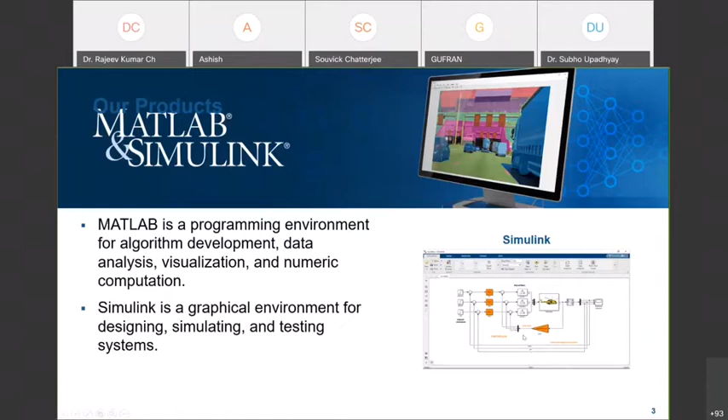So we have a controller, and then we can have transfer functions, and then we can use all of those. And then there are multiple toolboxes for specific applications, like this is typical of computer vision, but we can have multiple different based on the applications. So these are the products.

In terms of users, we have multiple users, many from academic environments, and then there are loads of commercial and industrial usages as well. If we look into any automotive or aerospace companies, every top automotive or aerospace company uses MATLAB Simulink for control systems, for AI, or for many of the building automation applications, which we will talk about as well. So many companies, like Tata Motors, Toyota, Honda, Audi, Tesla, all of them have been using it in different forms.

And we'll talk about how it is used for buildings as well, because for example, Tata Steel has been using it for their factory energy management. In terms of industries, aerospace and automotive till date are the biggest users. So if we think about, say, from NASA to ISRO, and then maybe Airbus, Boeing, so all of them are using it in this form.

Then there is biological sciences. There are multiple research efforts ongoing in the sector of COVID-19 as well. If you are interested, you can look into COVID-19 MATLAB and Simulink research, and we have dedicated a page so that faculties and researchers can talk with each other, and we work with them to make these things faster as well.

Then communication, electronics, energy production, which we will talk about today, is one of the sectors as well. Railways, we have been engaged with railways in multiple forms as well, for things called predictive maintenance, which goes into industrial machineries and things like that.

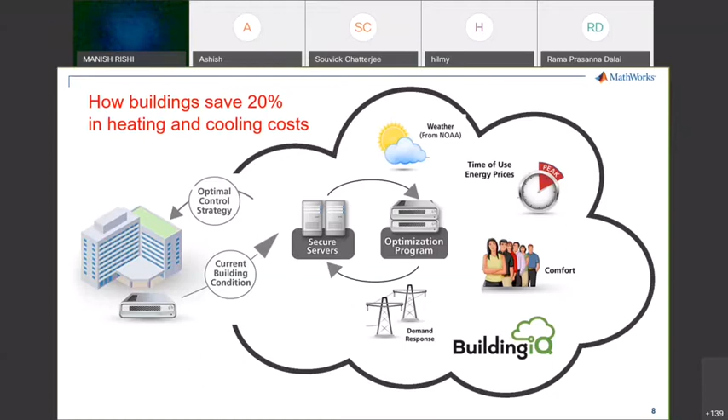And if you're into control systems, you know that we give a set point and then use things like PIDs so that we stay within that region. In a traditional energy management system, we define a comfort bound, say between 21 and 24 degrees Celsius, give the set point, and the actual temperature remains within that range.

Now in a smart energy management system, the comfort bounds are not fixed. It depends on how many people are there, the time of day, whether it's a cloudy or clear day, and what the outside temperature or humidity is. All those things come into the picture here.

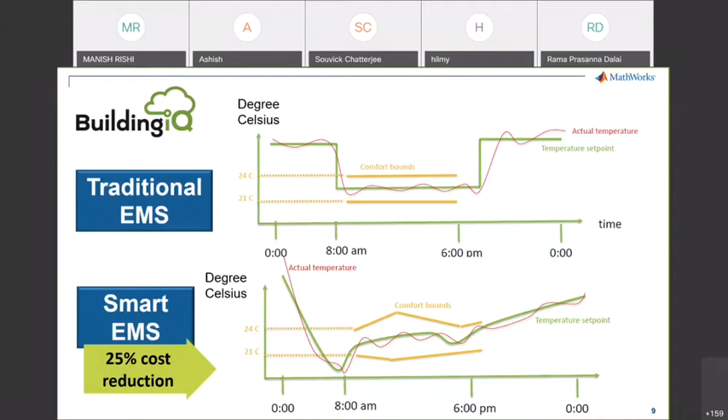So, how we define the constraints, we'll come to that—how to gradually reduce the temperature. There can be controls associated with it; we can apply multiple control algorithms associated with the air conditioning units. It's not just one split AC—when we talk about a building, there are multiple such units which need to be controlled together, so it's more about different ways of management, which we'll get to.

So static policies need to be replaced with dynamic policies based on what's happening, taking decisions in real time. It's not only about offline data—we need to account for real-time data too. We don't just run a simulation, get the best design, and stop there. We want to create a model, but update that model in real time based on the data as well. There are multiple terminologies for this.

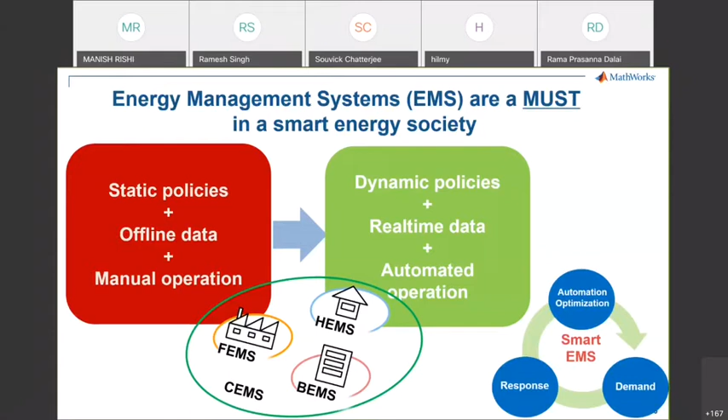What we will talk about - I won't go into the specific data for that BuildingIQ, but it is very similar, because we cannot share confidential information of that particular company. I'll give you both the PPTs and also the demo we will talk about. I'll switch over to MATLAB now and show you certain things, and then show you a link from where we can download the dataset and the models.

So let's take this example that we have a community. In this community, we have the solar panels, the photovoltaic cells, we have power electronics, and then we want to integrate all of them, essentially what we talked about.

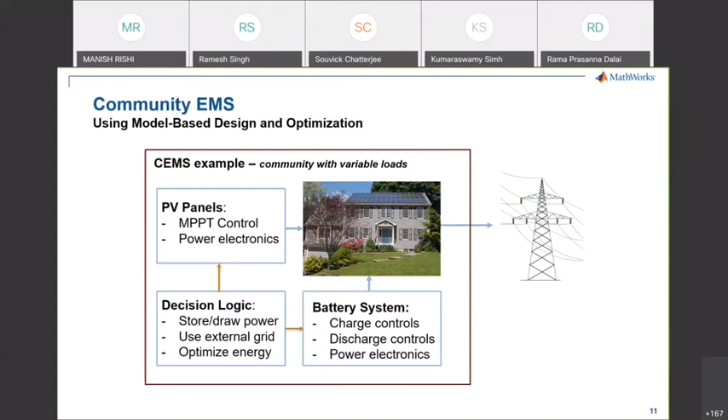The advantage of MATLAB is we integrate with all these different sorts of applications. There are things for control theories, for machine learning - the prediction part of it - for battery, power electronics, photovoltaic cells, all those things are there. So we can use one platform to do the entire modeling.

There's a terminology for that, an industry terminology - now many people are using this, it's called model based design. Model based design basically means we create the entire model of the thing we want to design in the virtual environment. So it's not like we just model the solar panels, or just model the battery - we model the entire thing, so that if we change one of the parameters of this photovoltaic cell, we know how the entire system responds to that.

We want to see the final output, like how much power we're saving from the grid, or how much cost we're reducing, even including economics as well. So we want to see if we change one of the parameters, how the entire system responds, so that we can come up with the best possible optimized design. That is not only optimized for the solar panels but might not be optimized for the entire system here, because we need to integrate all the things. So we want to design this experiment in such a way that we come up with the optimized system as a whole, so that we achieve what we desire to achieve.

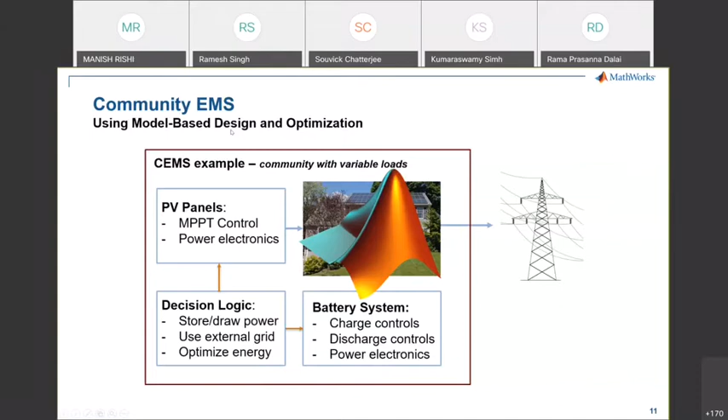It's not limited to just getting the best possible photovoltaic cell or best possible battery - we want to do that as a whole. And that's true for this battery energy management example, but also true if you think of automobiles, aircrafts, or any factories for predictive maintenance. Nowadays it's called model based design, and that's the advantage of doing that kind of simulation, where we integrate all the different aspects of it.

Okay, so now if we have to build this, what do we need? We addressed the gaps and what we want to achieve, and based on that, if we have to create this, what do we essentially need? So these are the things we need.

We need an integrated development environment where we can do all these things, like accessing the data for data analytics, because if we want to do prediction for tomorrow, we need data for the past. That is what typically the concept of artificial intelligence is, where machine learning comes into the picture, which helps us do predictive modeling.

Many people are talking about AI, and it's there in different forms now. The advantage of what we're trying to do is we want to focus on application. It's not just using machine learning because everybody is using it. We want to make sure an engineering problem is addressed when we're doing these advanced statistical models. So there comes the concept of predictive modeling.

And we cannot get rid of anything classical, like control system design. That is always there, so that aspect we have to integrate. We cannot achieve anything without the controls.

If we have to optimize the entire concept, then we need an optimization algorithm. There can be multiple different forms of optimization algorithms, and we'll come to this. You can have a gradient-based optimization method, or a data-based optimization method. So all those optimization algorithms need to be there as well.

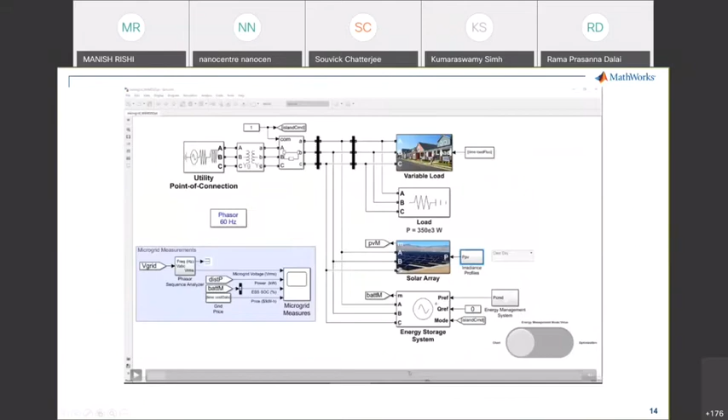So now essentially, we have this in the slides as well, but I'll go to the MATLAB environment and show you. These are there in the slides which you can see later on, but let me just go over to the MATLAB environment for now.

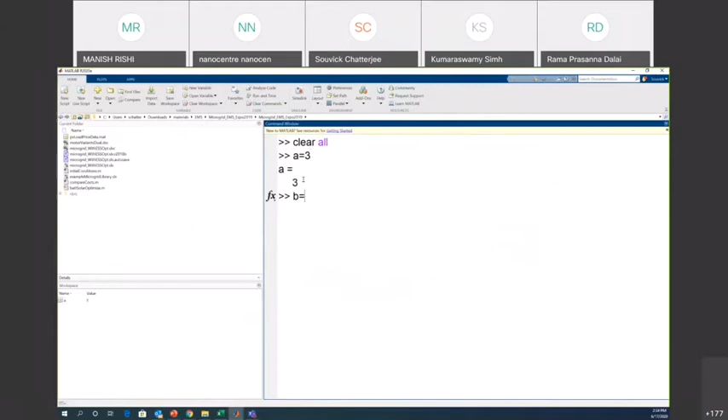Since many of you have used MATLAB, this is how it looks for those who have not used it. This is where you can do something like a equal to 3, b equal to 3, c equals a plus b, things like that. And then I can just clear this window. Clear all clears the workspace area if we want to get rid of previous values and stuff like that.

There are multiple things here. New script is where you can create your own script, the .m files. New live script is where you can create scripts which you can think of as similar to a Microsoft Word document. Let me just show you - it's like a second thing, so we can shuffle between text and code.

For example, we can just write 'example' here, and then if I go to the text format, it becomes like text. So these are not MATLAB codes.

And then if I go to the MATLAB code, let's say t equal to 0 to 100, and then y equals sine of t. If I just do this and run this section, it will run only this part, not the text part. I can break this into sections as well, so it runs separately.

So this is like Microsoft Word with MATLAB coding. These are text, which has nothing to do with MATLAB, and these are things that do have to do with MATLAB coding. So we can combine them, and then save this as PDF, Word document, LaTeX, or HTML. Now there are multiple other things here as well.

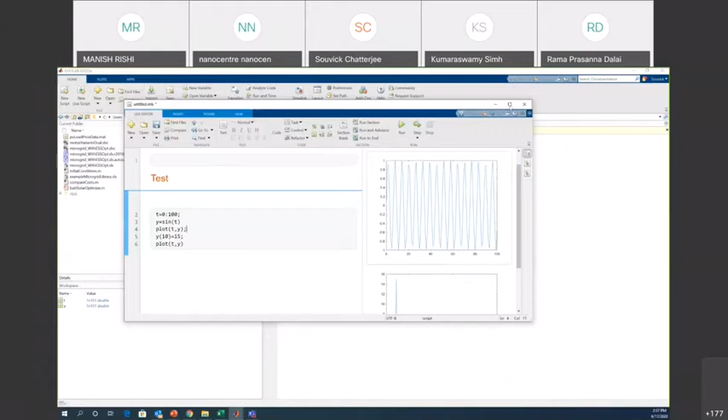I am using 2020A, which is the latest version, but you can do live scripts from 2017 as well. This is called a live script, and it saves as .mlx instead of .m format. The .m is basically the MATLAB script. If I write something in a new script and save that, it becomes a .m file. This becomes an .mlx file. The .mlx format came from 2016-17 onwards, and there have been multiple additions to this later on. I'll mention what those are in a little bit.

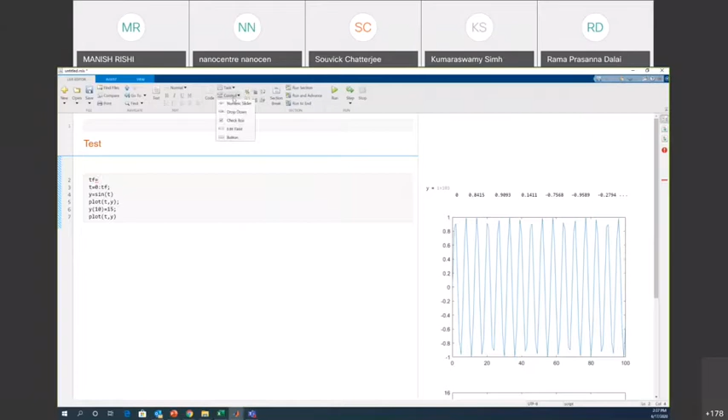So say for example, if I have this outlier now, say I want to make this 100 an interactive thing. So what we can do is say TF, and then I say this to be a control, so I can say this to be a numerical slider, starting from say 50, an increment of 1, up to 100.

So maximum to be 100, increment of 10, say. If I run this now, you can see that this changes the plot. If I make it 50, you look into this changes as well, it changes to 50. Now if I change this to 100, this will change again to 100. So this is interactive, like a slider you can put in.

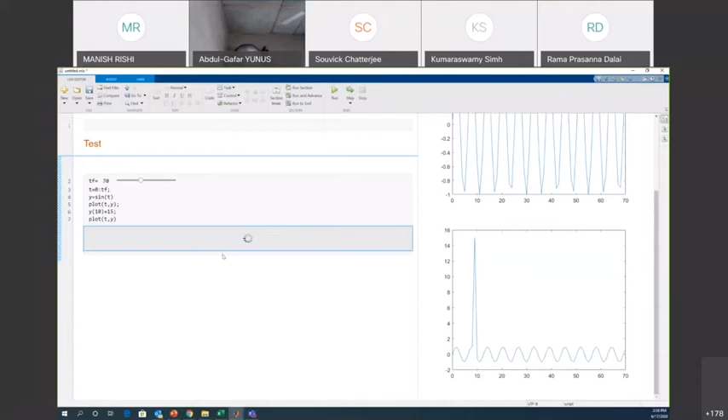This helps because you can change the parameters and see what is happening. Now say if I have this outlier and want to remove it, there's something called a task here. If I go to this task and say clean outlier data, and give this task to the live script to clean up the outlier, this opens up, and we say the input data to be y.

So this is our y data, and if I do that, let's see what comes up on the right as a plot. When this is running, you see on the right this is the outlier which I have induced inside the data. Now this live script has automatically suggested this is the clean data. Right now, this is a simple situation.

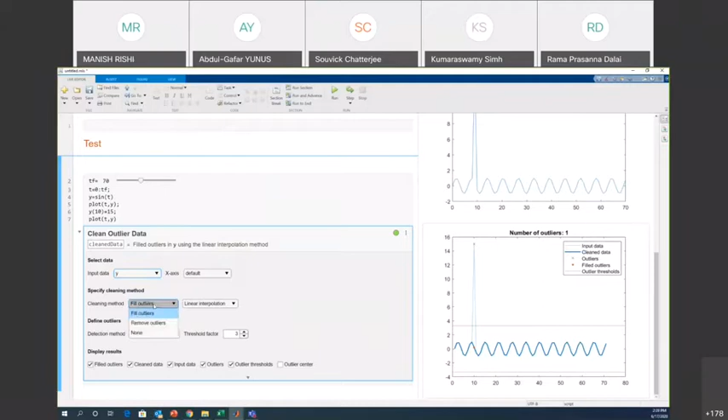I'm injecting one outlier here. But if I take in data in real time from a building for energy or load or any of those formats, we might have outliers. We can use these segments to clean this data, or find out where the outliers exist. So there are multiple things you can do: you can remove the outliers, fill the outliers, or do linear interpolation, because the algorithm is also crucial.

So all these algorithms are inbuilt, but we can also create our own algorithm and put it here as well. Based on which algorithm we use, it can be linear interpolation or just a previous value. So instead of this 15 value, it will take the previous value, right? That's how it is, it just changes.

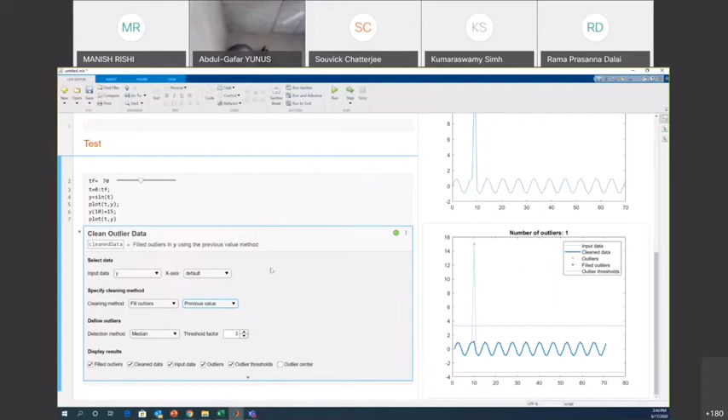And the advantage of what you can see here is we are not writing codes. I mean, we can do this writing codes as well, but what we are doing is using this task. These are like applications, apps. So both options are there, we can write codes or we can do these sort of things. So this is just an overview of what this exists.

And also speaking of these apps, there are multiple apps here as well. So if you are doing say curve fitting, we can use this curve fitting to do what we want to do, and then we can generate the MATLAB code out of that automatically.

So our live script, why do we use live scripts? We can use live scripts maybe if you want to export it as a PDF, if you want to have it as a document, like you explain the concept, and then we put those interactive sliders and things like that as well. The important thing is you have everything together. You have the document, the theory part of it. You can put diagrams there, equations like LaTeX equations, references, any of those, and then save it as a PDF. So it becomes like a full-fledged document for you. That is one advantage of live scripts.

And then you have the tasks which we talked about. So the tasks are basically these apps, and all these apps are there which we can use for any of the applications. Like if you have a signal and you want to see the Fourier spectrum of that signal, you can use the signal analyzer.

MATLAB coder is if you want to generate the C or C++ code out of any MATLAB code, so we can use this to generate it automatically. Application is if you want to develop an application like an exe file and you want to share it with somebody who does not have MATLAB, so that can be done using this. You can create an app for Android, for iOS as well using this.

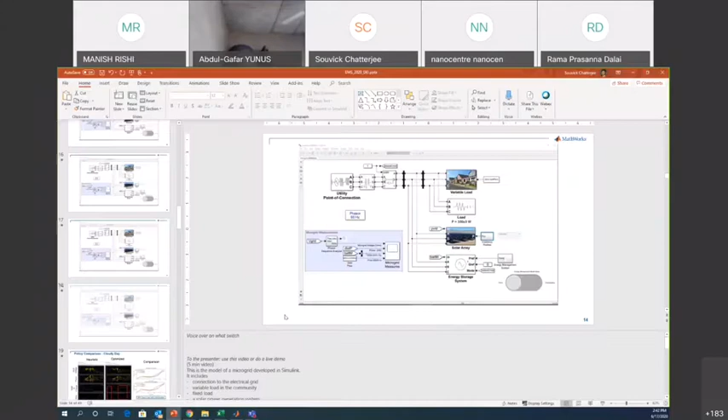Okay, so this is basically the whole concept. Now what we will go over to, this is like the MATLAB part. Now what we really also want to talk about is Simulink, because these things are more like the controls part of it. Simulink is kind of the de facto thing which people have been using.

So let me just go over to Simulink. We can open up Simulink in this way, or we can go to the home and click here. So if I say Simulink... yeah, it just opened in my other screen, so I'll drag it here, and click on blank model.

So this environment is kind of this white canvas where we can create the model we want, instead of writing scripts.

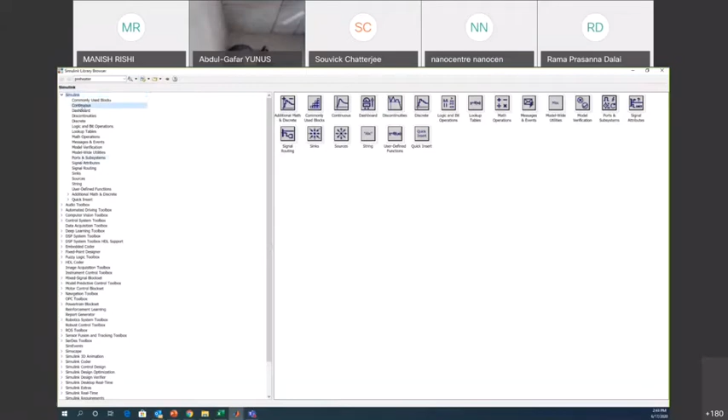So if you look into this library browser, these are the different blocks that already exist inside Simulink. If I go over to continuous, you can see there is a derivative, an integrator block, a PID controller block, and things like that. Then if I go to math operations, you can see absolute, addition, all these things. So all these blocks exist here.

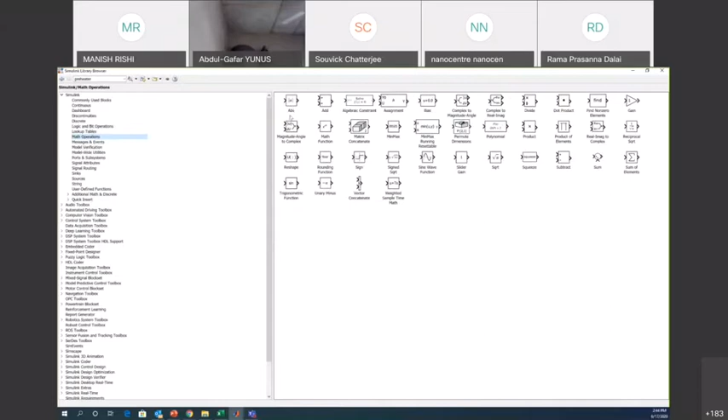All these blocks essentially have a left port and a right port, so something comes in and something goes out, and whatever happens inside the block is the operation we want to happen. If I go to the sources, you see only something is coming out, so these are the sources. And similarly, sinks are where everything ends. This is typically the Simulink environment. We can drag these things in, but for easy use I won't do that.

Say for example, if I want to draw a sine curve, I can just type sine and choose this sine wave block in sources, since there's sine, lookup table, and other options. So we select sine wave, and then I click again and choose scope, because scope is a block that's kind of an oscilloscope, where we see the graph. Then we connect these two things.

Now if I want to run this, we can just run it. And then if I click on scope, we see how the plot looks here. Now this is 0 to 10. If I want to change the time to say 100, we can make it 100.

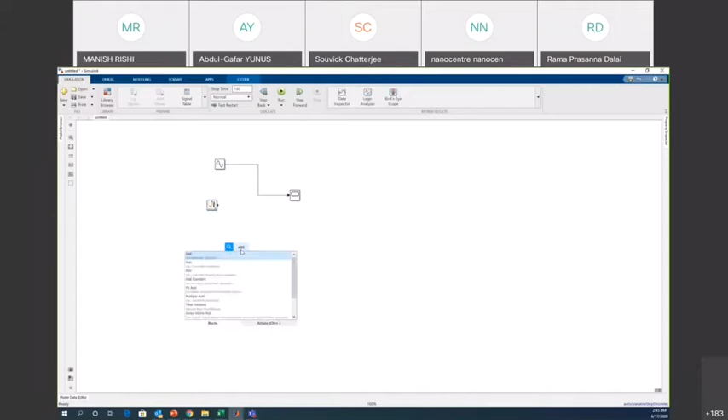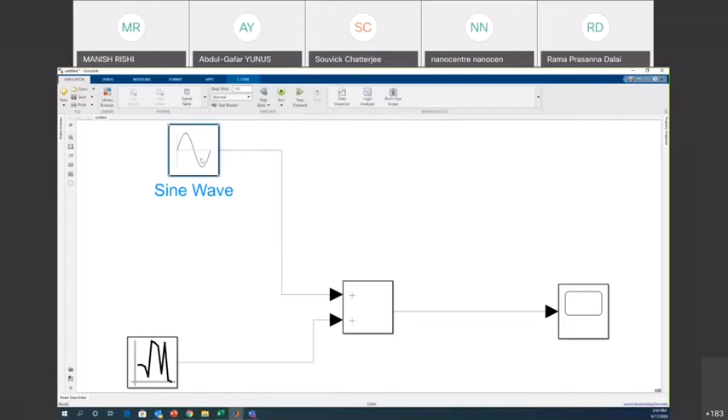Now if I want to add, for example, random noise, a random number to it, I say random number, and then I can use an addition block. So if I want to add this sine curve and the random number, and then see the output in the scope, I just hit space to make it bigger so it fits things. Now if I run this, you can see in the scope the plot has come up.

Now a question was asked: how do we integrate with hardware and convert to C and stuff? If you are using Simulink like MATLAB 2019b and stuff, you can generate the C code just using these apps. You can click on generate C code, and the C code will generate from whatever you are doing in Simulink.

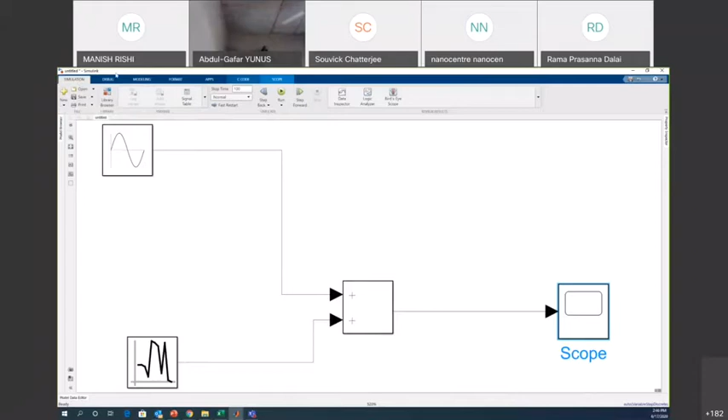So this is the C and C++ code advisor, where it gives you certain suggestions for making the algorithm better. Now if I go into this model settings again, I go to modeling, then model settings, and let me just show you this model properties.

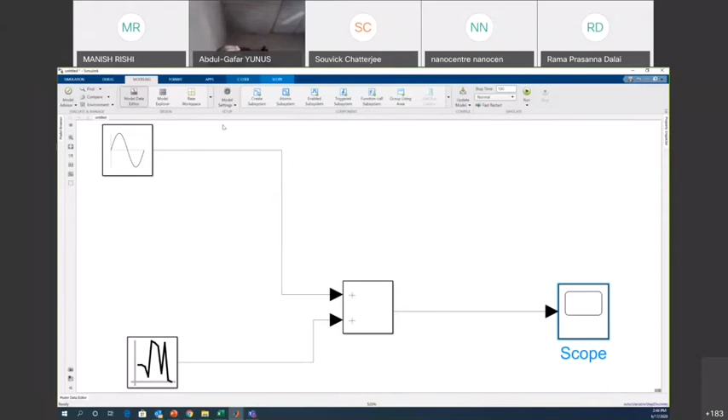Okay, so if I click on model settings, this page opens up. Now this page has the start time and the stop time, so this is how much we are doing, and it's the same thing that is shown here. So 0 to 100 is 100. And then there are multiple solvers and things like that.

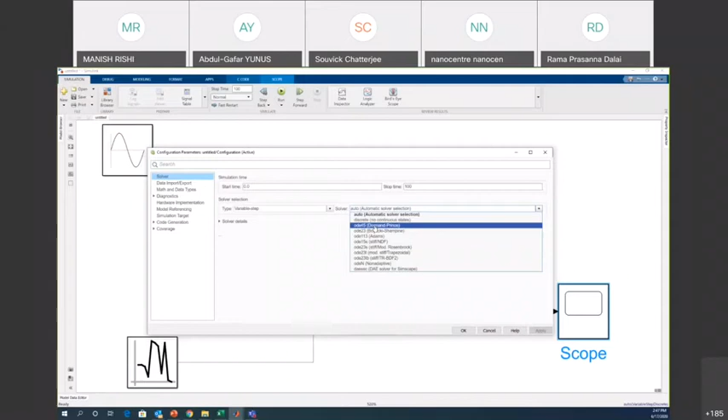We can use automated solvers, like if you're solving a differential equation and need to solve it, you can choose which solver you want to use. It can be like ODE45, which is a combination of fourth and fifth order. Or it can use 113, 23, which means second and third order, and these are all part of variable step. And then you can use fixed step. There are immense numbers of these options.

I'm not going into so much detail because then we can't cover what we were aiming to cover. So if you want any information on any specific things, feel free to reach out and we can talk separately as well.

Now, if you look into here, there's something called hardware implementation. So in this hardware implementation—any questions, or else you can just mute it.

So in this hardware, we see that there are multiple hardwares listed here. Now there is one more step we need to do before we go to this area, and that is in this MATLAB window.

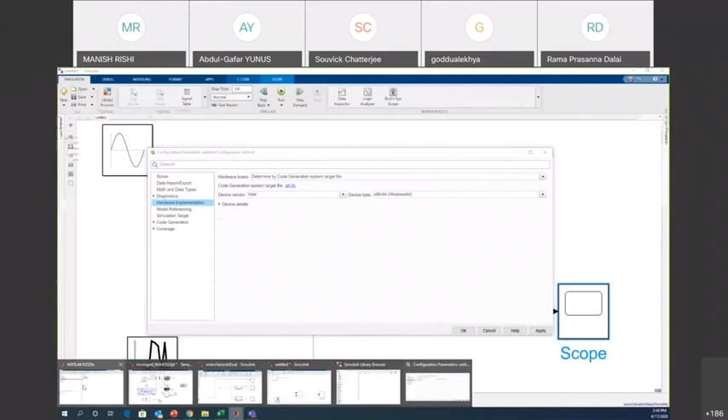If you go to this add-on, there is this add-on section. One more thing to know: when you download a new version of MATLAB, you might find it to be really heavy, big in size, and that creates difficulty when you're working from home. So in that case, you can just download the base MATLAB and Simulink, and then get anything else later whenever you need them through these add-ons.

So in this add-ons section, if I click on this, you can search for any hardware. For example, if I search for control system, I already have it installed, but if you do not have it installed, you can install it by searching here.

Now, for example, if I search Arduino here, you can see there is a MATLAB support package for Arduino hardware. If you click on this, you can download the Arduino support package and install it. Similarly, if you want Raspberry Pi or any motor control things like Texas Instrument hardware, you can get all of those from the hardware settings.

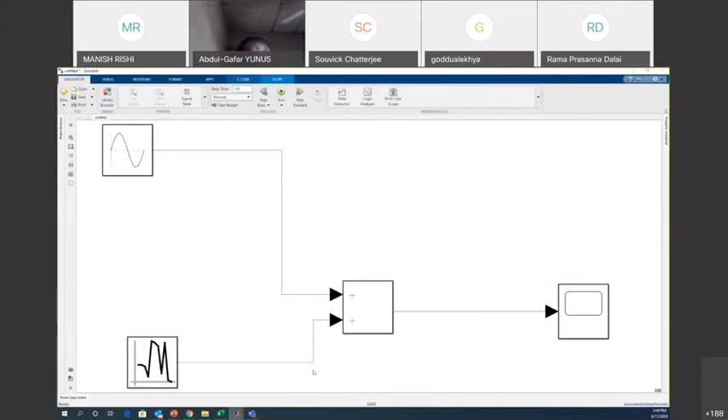And once you do that, let me just open that page. In this area, all the hardwares you have installed will come up. So these are the ones which I have installed in my system, and it shows up.

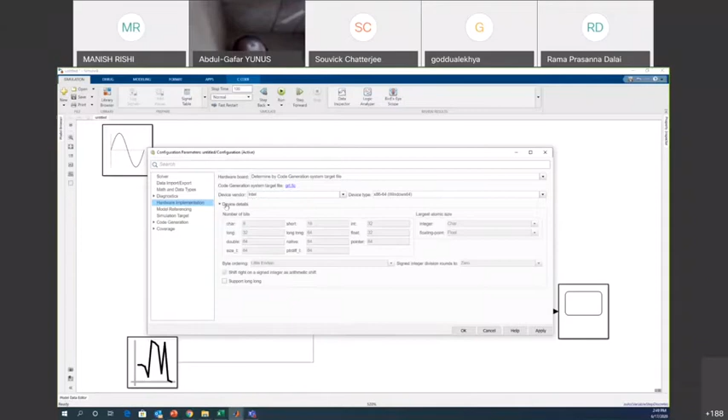And then you can install any hardware you have, any semiconductors. What you can do is just put everything, choose the hardware, the device details, and all those things. Then this algorithm will run on that hardware. So you choose the target, which one you want to use, and it will run on that—it can be a specific Arduino or a specific Raspberry Pi or whatever. So this is how you integrate with the hardwares.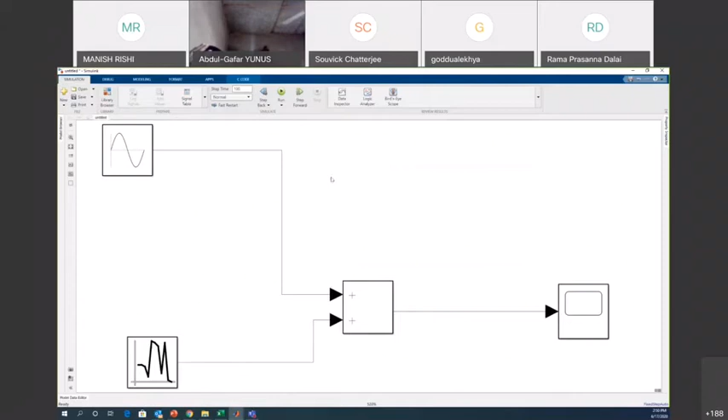Okay, so this is the basic environment of Simulink, how it works. What we will go into is another step up from this. If we go into the library browser, all these things are there: deep learning, machine learning stuff. Now, if you look here, there is something called Simscape—that is the area where we can do something called physical modeling.

If I go into, say, electrical, and go for electrical elements, you can see all these elements are there. In Simulink, what we are typically doing is mathematical operations—integration, differentiation, any kinds of continuous operations. So if we have to solve, say, a simple DC motor, we can use the DC motor equation to solve it.

But using Simscape, we can use physical components instead, so we don't go into the equation. It's good to know the equations to start with, but if you have to scale up—like the energy model we are trying to do—starting from basic equations takes a lot of time. So instead we can use these components: capacitor, diode, transformer, inductor, current sensor, voltage sensor, and so on. Essentially, if you are drawing a circuit diagram, you draw it here, and using these things, everything else is taken care of.

Now, going back to my environment, let me explain one more simple example before going into the energy one. This is a DC motor—you've probably all seen what a DC motor is. If I go into this Simulink model, these are the typical components for a DC motor. We have, for example, two equations, one for voltage and one for torque, and this is how we model it in Simulink.

The red values mean we need initial values—of conductance, inductance, and so on. I'll address how to use these in just five minutes. So if you look here, we have inductance, resistance, and all those parameters.

What's happening here is an integration. Current is nothing but V minus IR minus KW. This is a multiplication block—we multiply K with W, and this is I. So I-dash, when integrated, gives us I, which then gets multiplied with R, giving IR. So the output is IR, and we take minus IR. We give an input of voltage, so we get V minus IR minus KW.

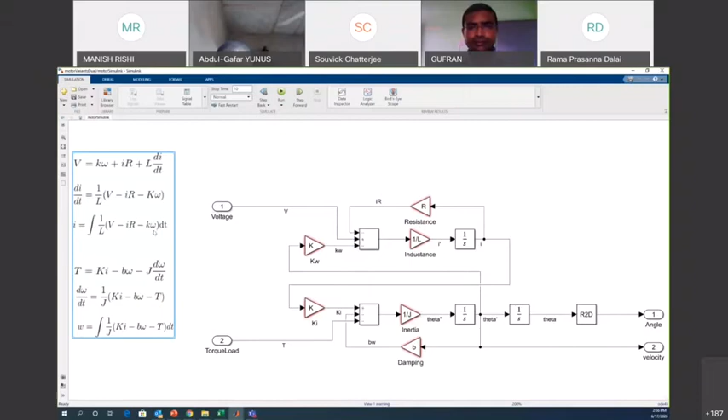So what's coming out of this block is V minus IR minus KW. Then what comes out is I prime, and when you integrate this, you get the current. This equation for I is obtained after integrating. Similarly, you can solve the other equation, and then everything comes together. This is the typical Simulink way of doing things.

Now we come to something called Simscape. Let's look into the Simscape block.

This does not solve the equation, so to say. What we are doing here is giving a resistance. How do we get that? We can just click here, double click, and it says this is a resistor block. So what we can do is search for resistor, and then we get this block, and this is what this block is, and you can give a value to it.

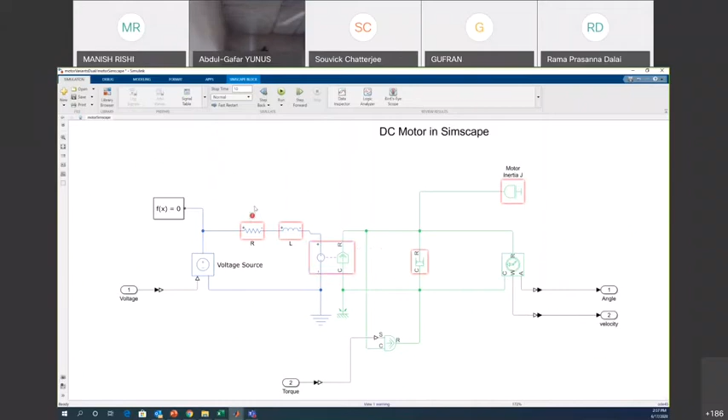So we get this resistor block, then we get this other block which is the inductor. We get the inductor, we give a voltage source, we're giving an input voltage, and then this is the ground, and this essentially is the rotational electromechanical converter. You can see here, this blue is electrical, green is mechanical. This is typically, if you think about an electrical motor, a DC motor, this is how it looks in terms of the circuit, and this is how you draw it in Simscape.

How do we find all these things? These are all there in this Simscape Foundation. If I go to Simscape, this is one of the components in Simulink itself, so it's the same area as Simulink. If I go in the Simulink environment, go to library browser, and then in Simscape we have all these elements there.

The other thing was, how do you connect a Simulink block to, say for example, a Simscape block? There needs to be one sort of thing, because if this is a Simulink block, it's nothing but an output block, an output port. If I can get this output port like this, but now if I want to connect this output block to our Simscape block, you see that this won't let you connect. You won't be able to connect.

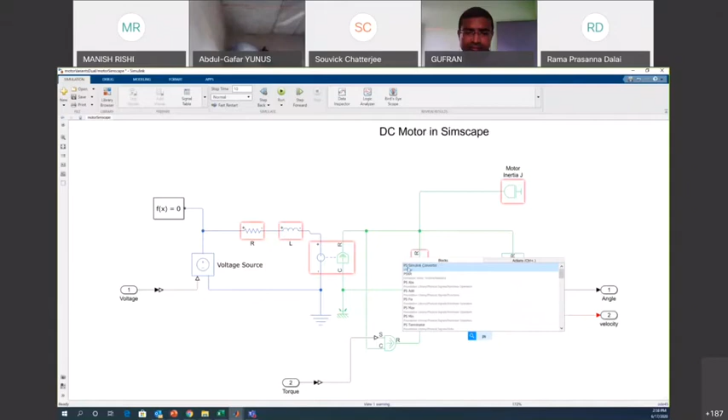So what you need there is something called a physical signal to Simulink converter, a PS to Simulink converter. That means physical signal to Simulink converter, and then it looks like this. If you put this in the path, then you will be able to connect them. So you always need a physical signal to Simulink converter if you want to connect a Simscape block to a Simulink block.

Similarly, you need the other way around. So this is again a Simulink block, and this is a physical block, so we need a Simulink to PS converter, a Simulink to physical signal converter. If you want to connect anything from Simulink to physical signal, which is the Simscape, you need the Simulink to PS converter. If it is physical signal to Simulink, you need the PS to Simulink converter.

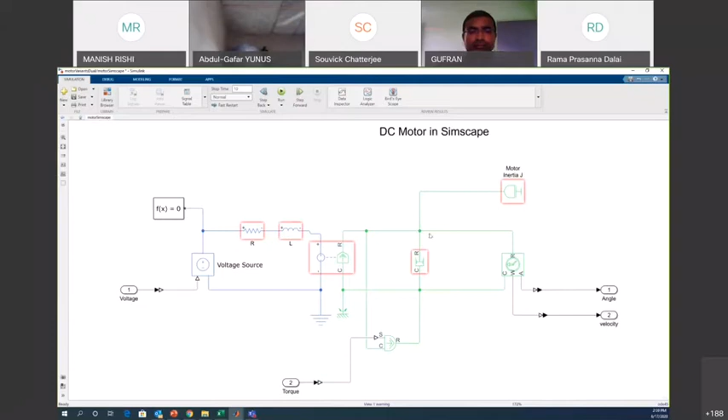So this is how you can use Simulink and Simscape interchangeably, and then we can plot both of them. This contains a motor in Simulink, and this is the Simscape version, and then we can see both of them.

We can run them. I think the error it is giving is basically because I don't have the values for all these things. So what I can do is I have this file stored with values stored in a particular file, so I'll go to that file and it will take up the values from there. So this is the DC motor, and the values are taken from here. I'll just run this now. Yeah, I just need to give inductance and those sort of things.

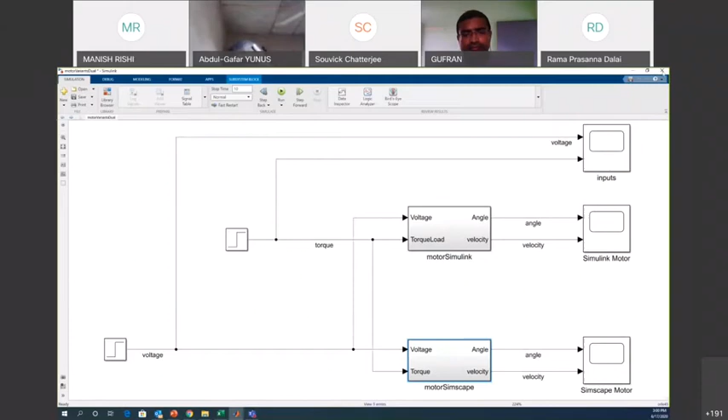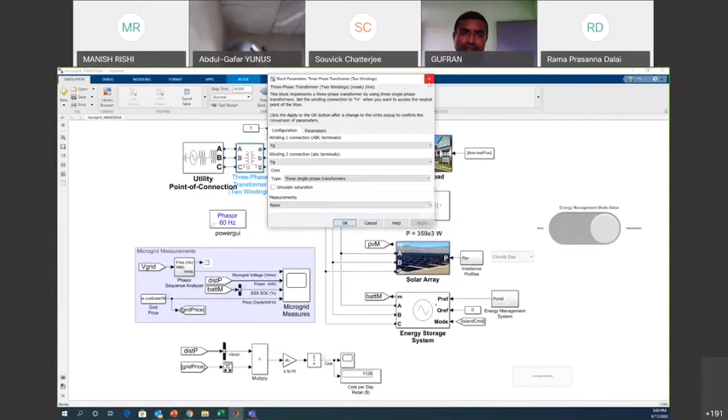So now this is the entire thing we are talking about for the building. If I look into all the blocks that are there, I'll show them and explain what each of them are. If you click here, you can see this is nothing but a three-phase source block, and then we use a three-phase transformer block. After that we have this variable load. This is a picture, but if I go inside this, we can see what it contains.

We contain a simple three-phase load, and we contain a dynamic load control block as well. So these contain multiple different parts. This part is for the variable load, and this is a load, a static load, which we are giving as an input. This is the variable load.

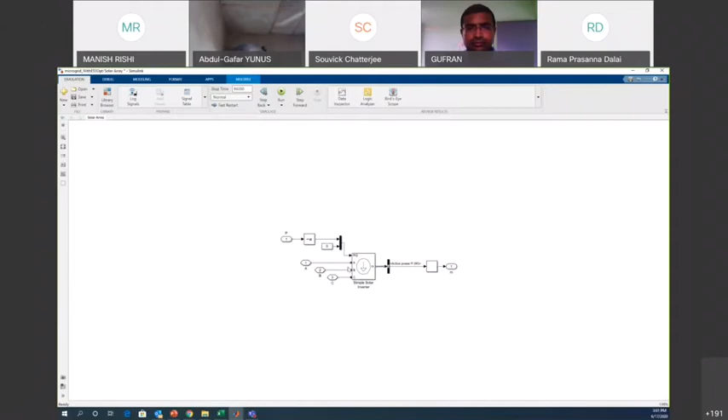Okay, now this is the part of the solar array. Again, if I go inside this, these are called masks in Simulink, and you can go inside this. So there you see there is a simple solar inverter. Now all these blocks are there in SimScape, and you can just use them.

Don't worry, I'll share this file, and then you can see in more detail. It's not possible to explain this entire thing in 1.5 hours or so. I'll share this thing, and then you can play with this as well.

Now this is called the solar array, which this is for that block. This is for the battery. This part is for the battery, and inside this battery you will see it contains the entire battery management system. So it contains all the different sorts of the battery part as well.

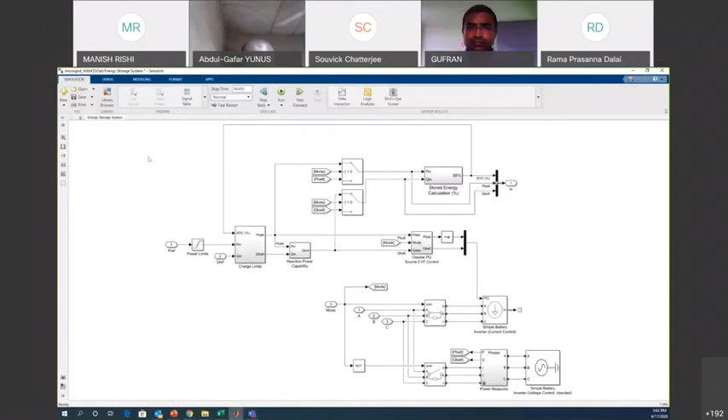Now what we do here is there are irradiance profiles. Here what we can do is we can choose whether we want a clear day or a cloudy day. And then this is for the battery, that part is there.

We can also shuffle between whether we want to do a heuristic model or an optimized model, so both options. These blocks are also in the library browser, and this is basically adding something in the file as an if-else statement. So that's something what you can do as well.

So this is kind of a bar. If I go here, then it will use the heuristic algorithm. If I go here, it will use the optimized algorithm.

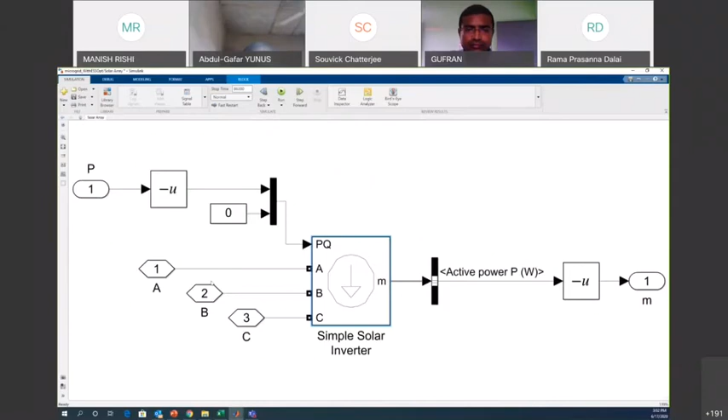Okay, so all these things are there, and then some of these are masked because they contain internally some of the things as some of the inner blocks. Like if you want to create the solar block, you need to have the inverter and then some of the inputs as well coming inside.

Now we are also comparing the cost per day. So say for example, if I have the grid price, the electricity price, and then these are called bus, right? So where we club both of the signals, and then from here we are just comparing the cost as well.

Okay, so now let's run this. If I say choose clear day, right? And then okay, I need to change the location of the file again, to make sure this does not create trouble, because many of these files are interdependent. So this is how you navigate to the folder where you are operating from, so that it can use the dependent files as well.

The file name, let me see, EMS. Okay. So from here, it will take up the files.

Now, if I start with, we can go for the heuristic and not optimized algorithm, and then we choose a clear day. And now if I run this, so you can see when the Simulink model is running, it says it is compiling here. And after the compiling part, it will say it is running, and you can see that this cost is changing.

And then it will stabilize for a per day cost. So it says that this is based on the dollar cost of US, so that's why it is showing in dollars. So this is the cost per day.

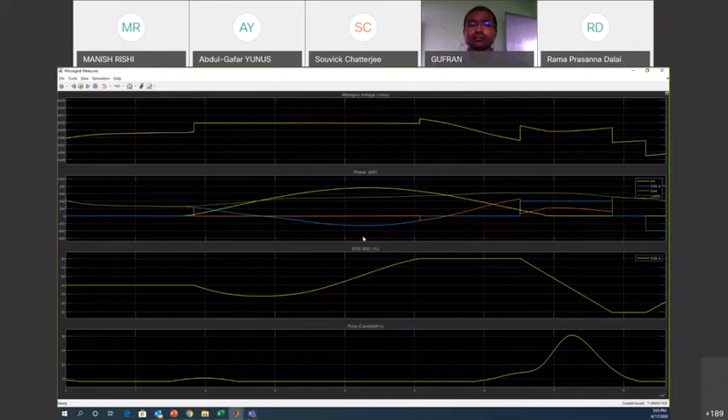So we see that this is a kind of parabola curve, and this area here shows that the state of charge is based on that. What's happening in the state of charge is nothing is happening here, and then the charge is reducing. So we are drawing electricity from the battery at this point of time, and we are not drawing anything from the grid at this point because the grid is 0.

So we are drawing from the solar panels, and the battery is also getting discharged a little bit. Then we charge the battery again at this point, when you can see the grid goes up, and the cost is also going up. So these are some of the dynamic changes for the different voltages associated with the grid.

How to simulate a whole day with small running time - this is for demonstration purposes where I'm just running it with larger time gaps, but there are multiple ways to do the data processing in a smoother way as well, which we'll talk about if we have time later on. Okay, so this is how it looks like.

Now, for example, if I go for the optimized model, I just change it to be the optimized model, and if I run it again, let's see what happens. So it says running - I'm just waiting till it starts.

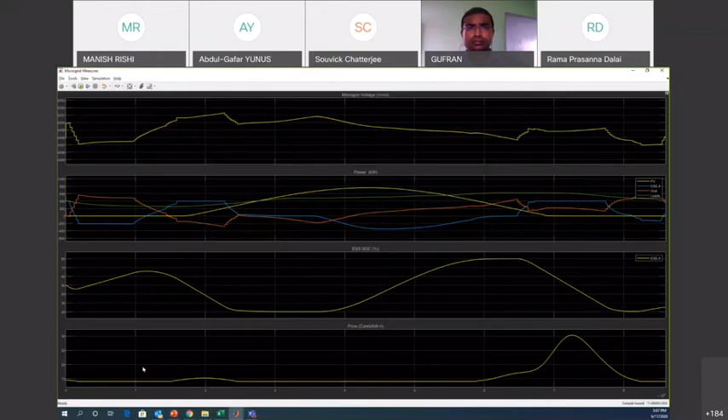And now you see it's not that straightforward. Here we see that the battery is getting charged kind of earlier in the day - it didn't start later on. So we see there's a drastic difference in how the battery is getting charged, how the solar panel is affecting it, and how the grid is giving power.

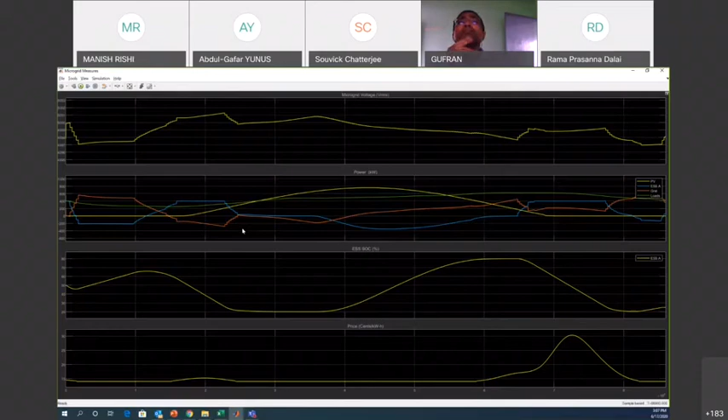So we find out results are dynamically different. Now if you want to see whether it actually helped with the cost, we can also click on compare models, and what happens is it runs both models and gives you a comparative study, and we'll have the data from there once it ends.

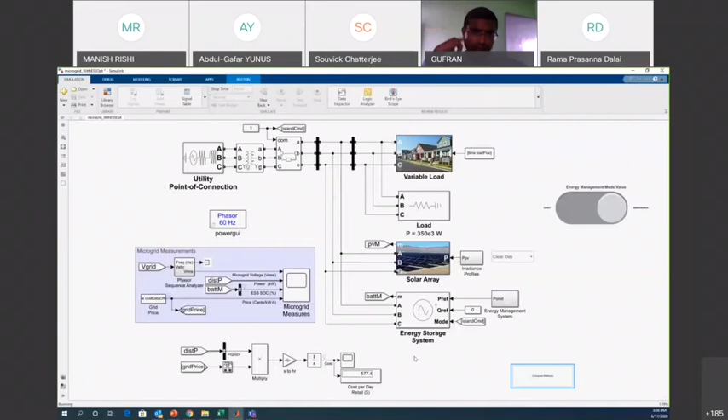In the meantime, while it is running, I'll explain a couple of things - from this, probably. This is kind of a summary of what we talked about. Let's see, I'm just waiting for this thing to end. So what we have talked about, if I go over here...

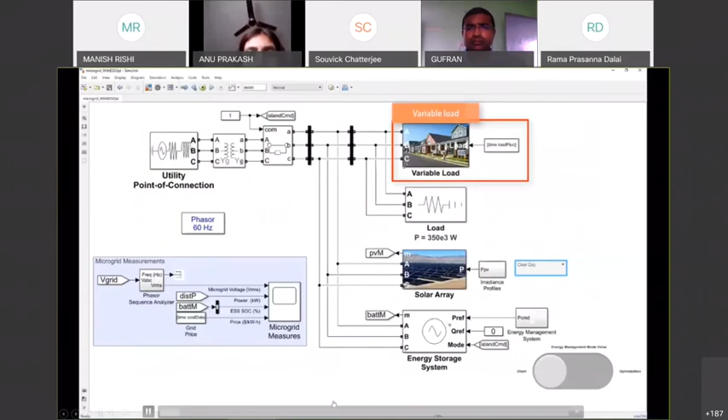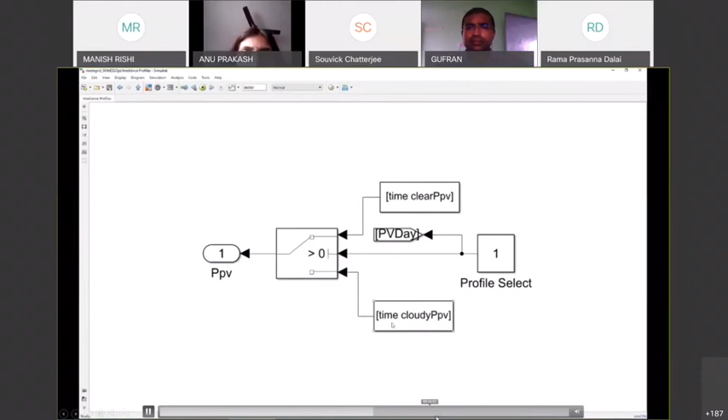Let me just play this video. So we talked about this variable load, and that contains multiple things inside as well, like the three-phase load. This is just a video of what I showed from the model itself. And then we have this time for the day, and all those things together.

So this is the other thing - at this point maybe I can pause here. What we have here is called a Stateflow diagram. In MATLAB, we have something called Stateflow, which is more of an if-else statement - if this, then do this, if this, then do this.

So we have both these algorithms inbuilt. What we can do is use this heuristic model or the optimized model when we are shuffling that bar - either it can use the heuristic or the optimized algorithm. So each can be used. The thing to mention here for the heuristic and optimized algorithm is, depending on which we want, we can use the one that we want.

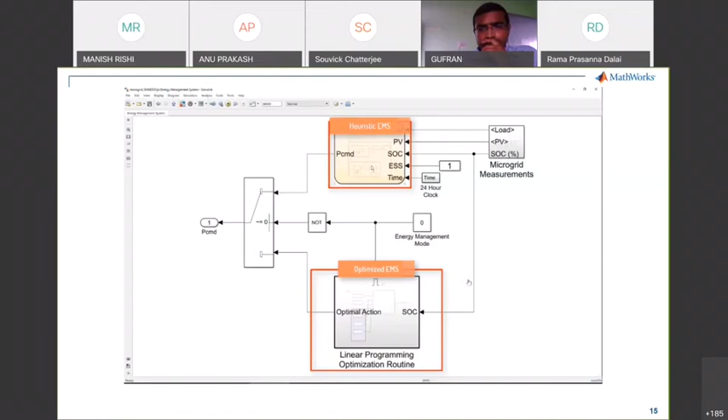Now this has finished running, so let me show you what came up. The heuristic approach showed a cost of this, while the optimized one gives about a 2% advantage. But remember, this is for a clear day.

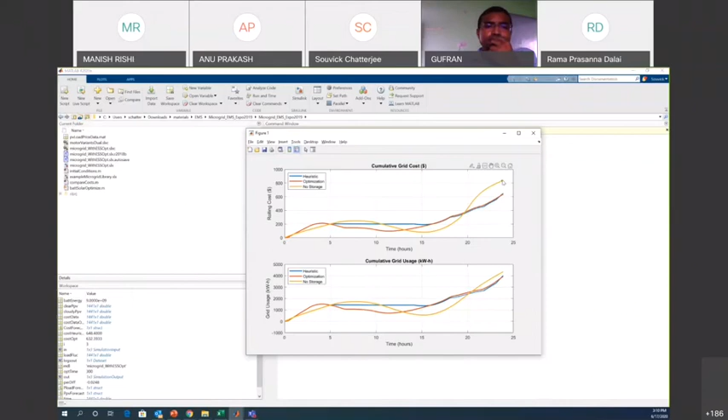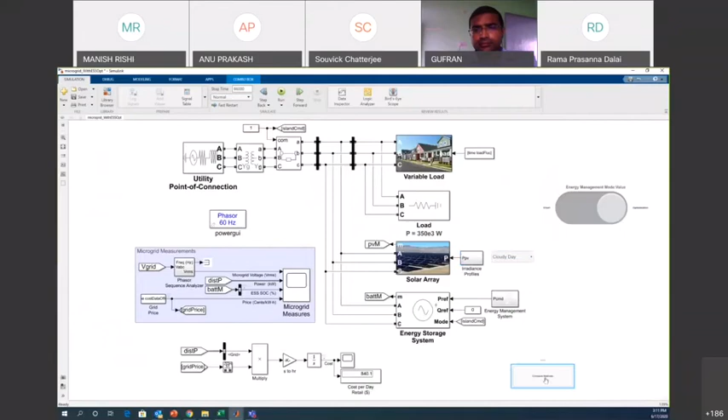But this changes if I switch to a cloudy day. Let me run it for a cloudy day as well, and then you'll see the difference. So if I change this setting to cloudy day and compare models, let's let it run and see what happens.

The one thing I'll mention is this is the model we talked about. This is how the clear and cloudy day will look like. The cloudy day is not straightforward — we see fluctuations in different ways. The photovoltaic cell's power is charging, but then suddenly when it's cloudy, this fails, and the action is taken based on that, along with the charge prices, electricity price, and battery state of charge.

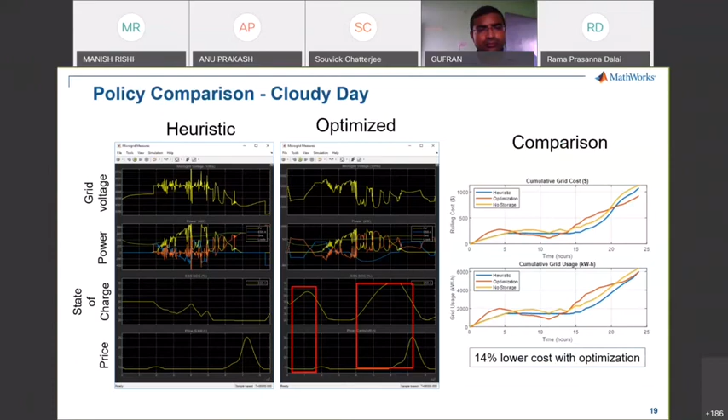For heuristic, the battery gets discharged here, but it gets charged much earlier when we're using the optimized algorithm. This is different, as we mentioned. And what we found for the cloudy day is that we can get a 14% lower cost with optimization.

Now that this has finished running, you can see I ran it with the cloudy day using the model. The heuristic model's cost was this, the optimized model's cost is this, and we find a 14% reduction in cost. This was run just now in real time, and this is what the plot showed.

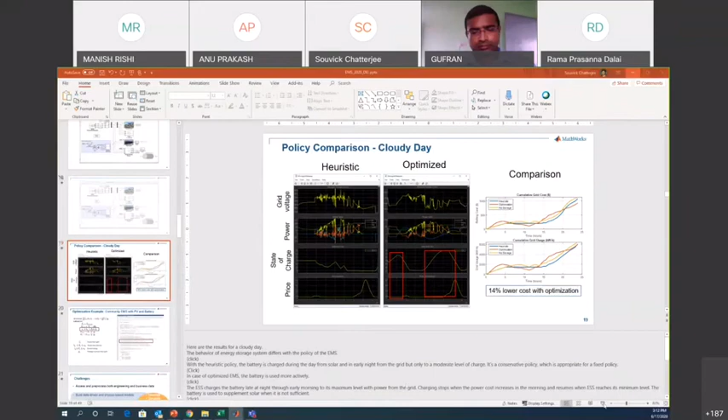Now, what did we do with the optimization part? I'll mention a bit about the optimization segment. For any optimization problem, we need an objective function and some constraints. In Simulink, we can interface with MATLAB coding, so you can write your own optimization algorithm, or use an existing one, and use it as a Simulink block with MATLAB code for your optimization.

So in MATLAB, we created a function for the optimization part and used it in a Simulink block. There was one question on LabVIEW.

Yes, we can integrate with NI hardware, and with LabVIEW as well, depending on the case — there are certain limitations. Please reach out separately so we can discuss that. With NI hardware you can integrate with Simulink, but with LabVIEW we can integrate in certain areas, and in others we need to be a little careful. So it depends a bit.

Now, looking at this objective function — our objective is to reduce the cost from the grid, and the constraints are to make sure the power load is satisfied, meaning the load balance. The total load should equal the load from the battery, the grid, and the photovoltaic cell, maintaining continuity. We need to make sure of that.

So in this MATLAB coding, what we're putting in is what we want to minimize — this is our objective function, and this is our constraints: the load balance constraint, the constraint that the battery doesn't run out of power, and so on. These include power from the grid, power from the battery storage, and all those things. This is how we do the optimization part.

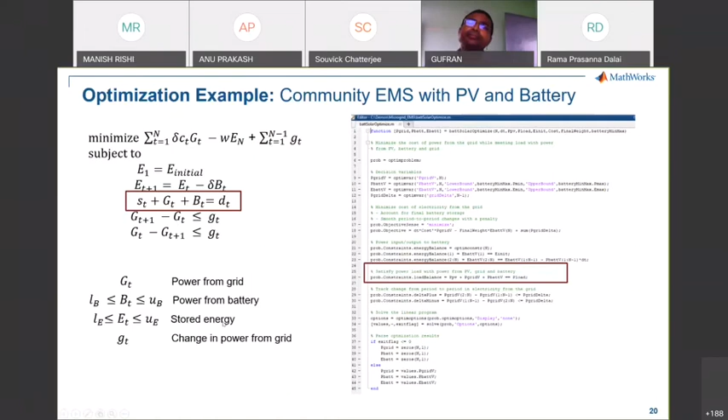Now let's see what we do, kind of summing up things. So we can access both data, and I'll talk a little bit about this part: building data-driven and physics-based modeling. Data-driven modeling is important, and we have to do the optimization part. We're integrating with the controls as well. This is a bird's eye view, an overview. There are multiple steps in between, and then if I'm predicting as well.

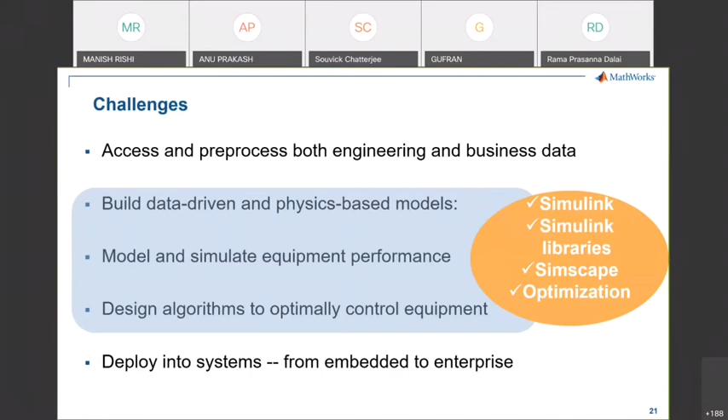If I'm predicting the load requirement for tomorrow, I'm also using the algorithm for regression, using the regression learner app. That is one other aspect that we are using. And then finally we create the algorithm. So what we've done covers data-driven and physics-based models, covering equipment performance, modeling the solar panels, the battery, the power systems essentially, and then getting out the best optimized algorithm, and finally deploying it to the hardware.

Now if we look into the optimization part of it, we can run it using heuristic, or we can run the optimization algorithm. For the optimization algorithm, we need to make sure where the optimization part is sitting. So we give these initial values, and then using that MATLAB code environment, we see whether the objective function is met, whether the constraints are met, and that's also happening in a trial and error method, because we can visualize this, see whether the accuracy is going up and the loss is going down, because that's what we desire, right?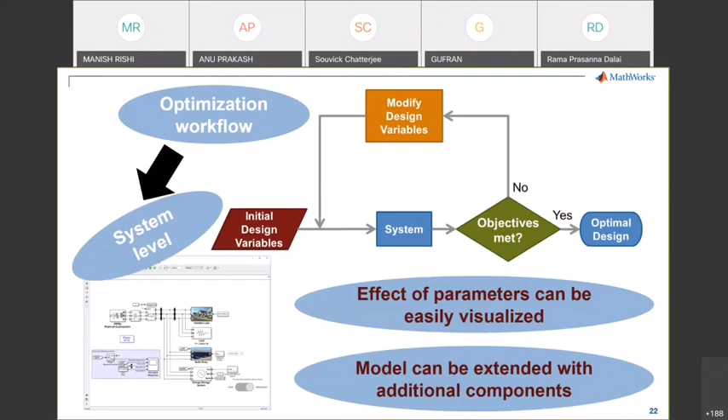The other thing we are also integrating here is basically the control system - model predictive control. So we have the transfer function and the plant as well. Both of them need to be covered. This is like a typical circuit, if you draw it, and this is what it's doing.

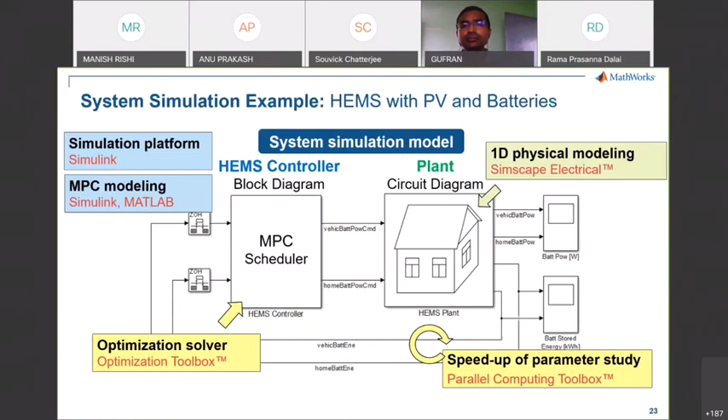Now in terms of MATLAB, as you can see, the platform is Simulink. And the modeling, the optimization part, or the machine learning regression part, it's using MATLAB. The optimization is using something called optimization toolbox. And then if you have loads of data, we use something called parallel computing toolbox. Parallel computing means we are computing parallelly in multiple cores in my system. In general, MATLAB or Simulink will run in one core, but if I make it parallelized, then it will use all the 3 or 4 cores. You can also do it in your server, or in a local system with multiple cores.

Okay, so now if you look into the overview, what are the steps needed? We have the data, and you can take data from Excel and all those things. You can import data very easily from Excel, notepads, or any other platforms, from hardware and stuff, or LabVIEW equipment as well. Pre-processing data involves outlier data, or you might have to find out what the data means, because domain knowledge is also useful.

For example, if you plot the time curve, if you want to find out how it behaves in the frequency domain, if you want to go to the spectral domain and see what are the important frequencies, because all these are time domain signals, you can go to the signal analyzer app and do an FFT. You can just click something and click a button and it will give you an FFT, or you can get the spectrogram out of it, and the code will automatically be generated. Right, so those are the things you can do using the pre-processing step.

Then developing the predictive model. Predictive model needs either a neural network if you want to go in that route, or you can use classification or regression, right? These are where you can use the AI, the machine learning concept of it. So you give in the data. If you're interested in more information about any of these segments, like the AI part itself is another hour or so of these things, so we can talk and share resources on all those things.

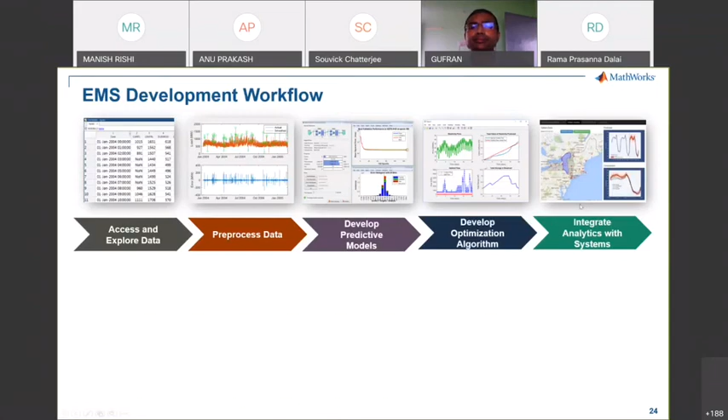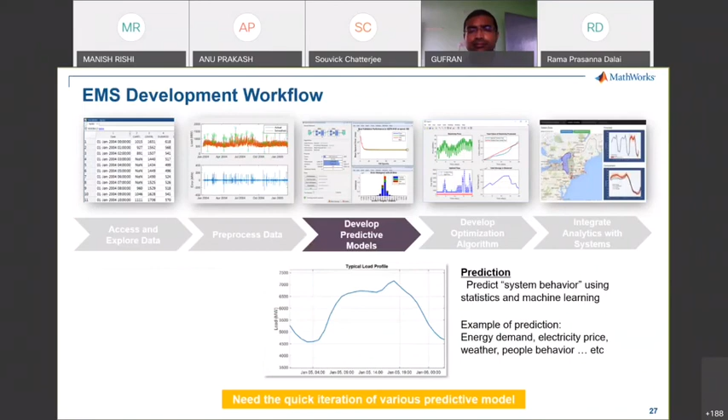And then you can do the control system part for the electrical things in Simulink and Simscape. So data, again, we talked about, you can use all different sorts of data. Pre-processing is basically the smoothing, the filtering, and all those sort of things. Developing predictive models, and then optimization algorithm and integrating with analytics. I think so, all those different things need to be covered.

Let me just quickly show one example of the neural network as well, since we are here. So maybe I can go here. So if I go to this apps region, you can see that there is something called neural net fitting, right? So this is using a neural network.

If I click on load example dataset, you will see that there is a dataset for building dataset, and this is there when you install MATLAB. It's not specifically for me, it's there when you install MATLAB. This example is there, so you can go here and then this dataset is already there. So if I click on here, your dataset will also come up. As you might know, the MATLAB documentation is pretty rich.

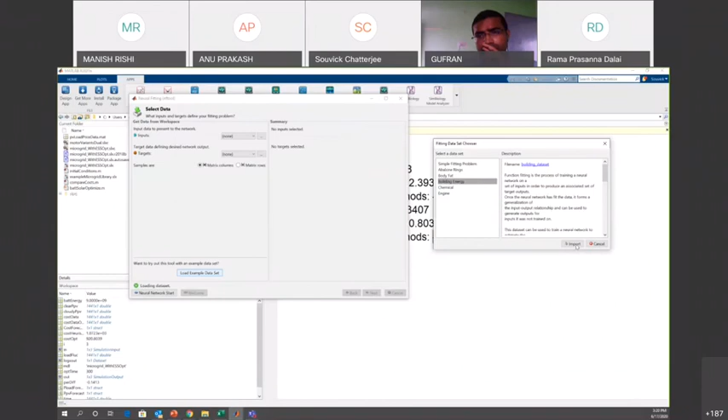So the documentation means this area, and you can get to this area. So if I just click on something, I'll show that documentation. So if I just import this, this is the dataset, and this shows the example.

And then you can get to this as well from multiple different areas. So you have the building inputs and you have the building targets, and then you can just click on next and then use training, validation, and stuff like that. Give some hidden neurons, because with a neural network you need to give how many layers are there, hidden and output layers.

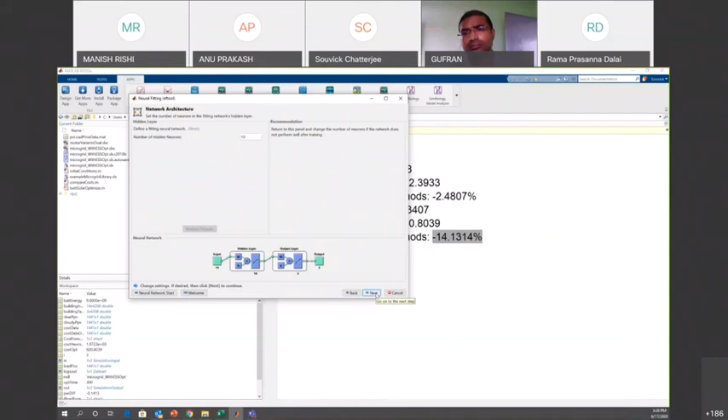If you know these things, fine. If you don't, please feel free to reach out later, because I'm not going into the details of this neural network part here today. And this is how you can do the training part and use a neural network for the prediction part as well. Okay, I'm just going to let it run.

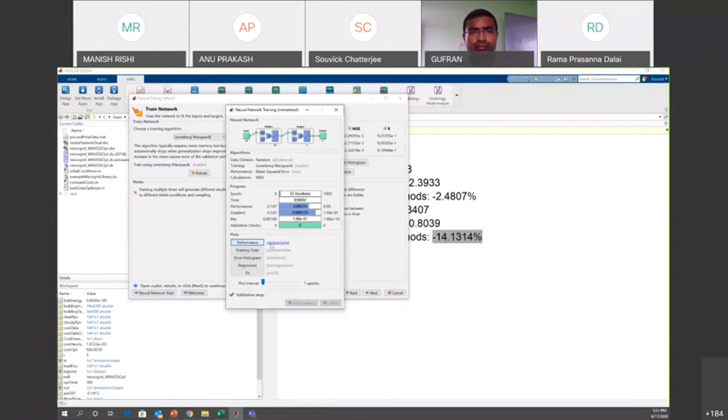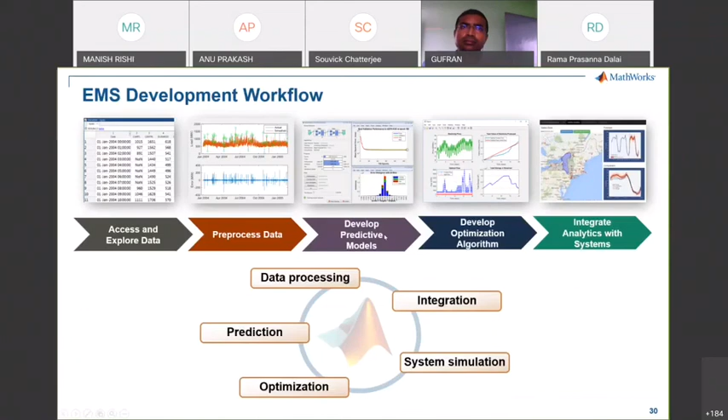So once you do that training part, what happens is, here you can see that this thing is getting trained and stuff like that, right? And then you get the output as well from here. And this is how you can just create a neural network for this building energy using this data. So this is for predictions if you want to do neural network fitting and things like that.

So the data analytics is happening in the MATLAB environment, the algorithm development, and then the system level design for the power systems we are doing in the Simulink and Simscape environment.

Stateflow is for that if-else logic. If this, then use heuristic. If this, then use optimized. Also inside heuristic, if daytime, then use solar panels. If cloudy time, then use this. All those things come in the Stateflow part as well.

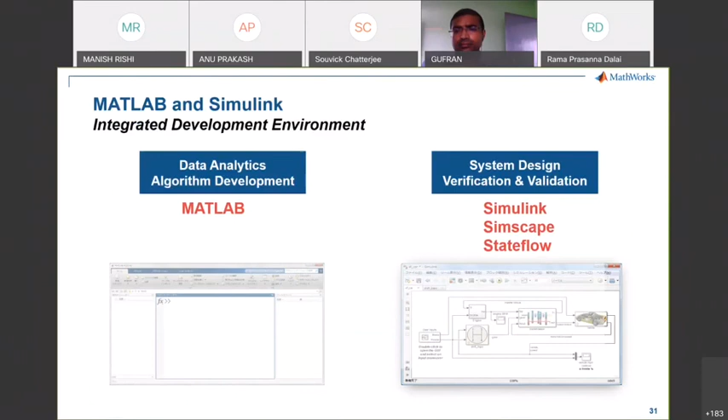And this is, basically you can do this in parallel as well, computing in parallel across multiple servers and things like that, and the virtual prototype comes in from the server as well. And also these algorithms are also built in if you are doing any machine learning part of it.

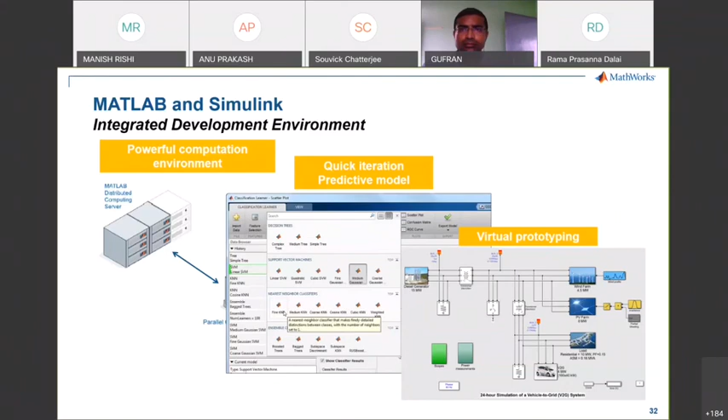So for example, linear SVM, cubic SVM, so you can use this app called classification learner app to classify any of the problems, because since this was a regression problem, we didn't go into classification much, but if you're doing this, you can go for that as well.

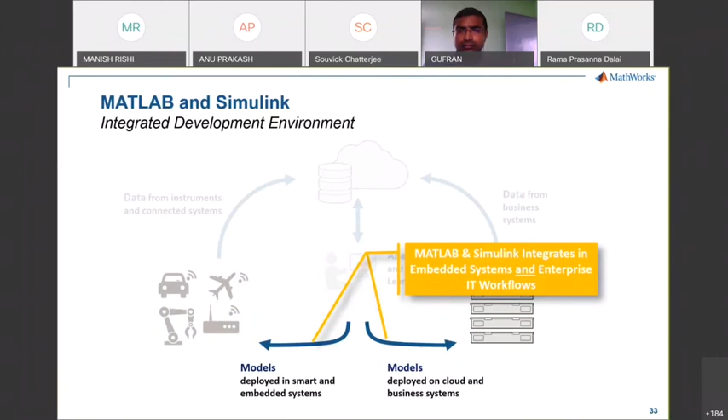Okay, and the final thing that comes up is deploying it. So you can deploy it inside the edge, which means you can deploy it inside the hardware. Like if you have a control system, you can put it there. You can put it on the cloud or business systems, right? So you can put it there as well.

And MATLAB integrates with all these different forms of other software as well. So for business systems, like Microsoft Azure, it can be Tableau, Power BI. So everything we develop here, it can go from there.

For taking data, you can take in from Amazon Web Services, Azure, Kafka, SQL. So if you're using any of these databases, we can take in data from there. And this is where we also do the analytics using MDCS, distributed MATLAB computing, which is like doing it in an HPC, for example if you want to do it in a cluster. So that is how it integrates with everything.

So this, for example, was another company trying to create low carbon homes. They were using fuel cells as well as solar panels and batteries. What they were trying to do is minimize energy cost and use the EV battery for additional storage.

So if you look into this, we have the home. That environment needs to come into the picture - what is the current situation of the house. So that comes in, and then it goes to the controller, feedback is taken to the controller, and the battery feedback loop is created.

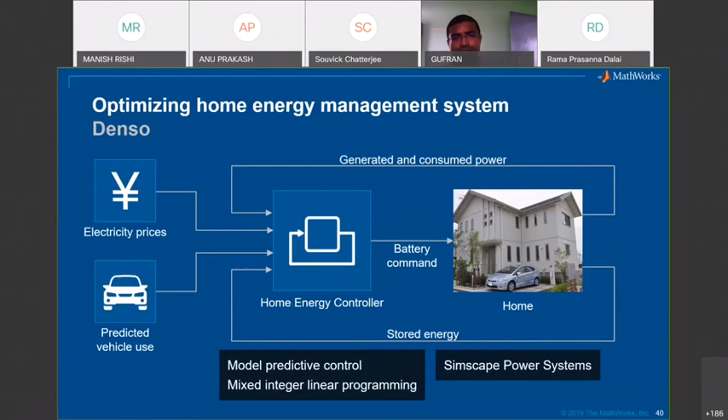This is another company called Denso, a company in this space. They used this for their system to create these low carbon emission houses. They had about 1,000 CSV files, which are notepad files, from which they get the data.

They did the pre-processing part of filtering out the data and parallel computing, what we talked about. And then they wanted to classify as well, so they were using something called the Classification Learner app, where we have all the modules like SVMs and all those, which combines with the Simscape power system, the control system, and optimization.

So it's not only AI classification which is in this part. That gets integrated with the core controls and Simscape Power Systems, where we get the photovoltaic, battery, and all those things come up, and then finally it gets embedded.

This is a quote we got from Denso. Denso specifically mentioned that the effort would have taken significantly longer if they had separate different tools for everything. So using this one platform, they have integrated machine learning, deep learning, data science, and all those sorts of things.